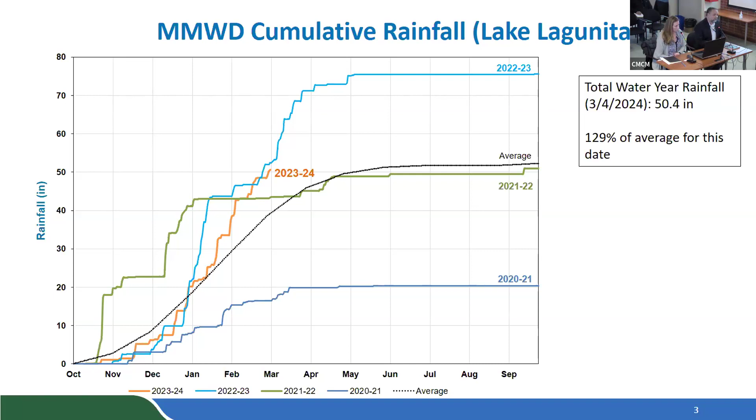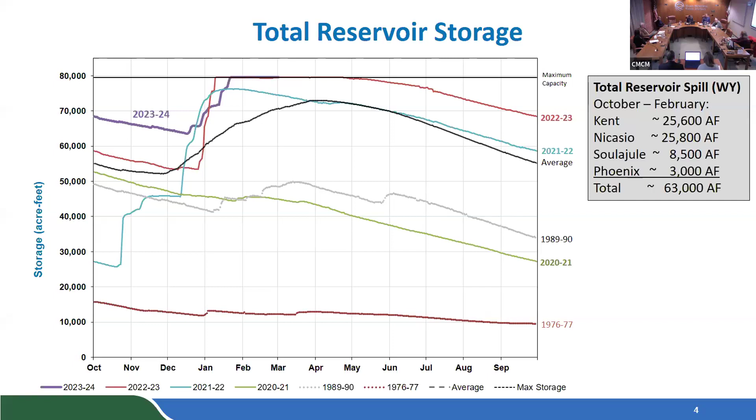This rain has been almost perfect, just every week it keeps the ground wet, never gets a chance to dry out, so it runs off. Shockingly perfect from my experience. I would just say it would be better if it rained during the week and not on the weekend, but other than that I agree. But you got to go back to Phil's thing - that may be true from the human side, but from the nature side, they don't know what day of the week it is.

So actually building off that, the runoff has filled up our storage, and at the end of January we actually started spilling. All of our reservoirs are full, at max capacity for all 7. One interesting thing looking at this chart and the reservoir spill over the last 2 months since we started spilling - going into this water year we were about 15,000 acre feet below, so we've gained that in runoff. With these storms building on each other, we've seen 63,000 acre feet estimated, just in January and February. So between that and the 15,000 gained in storage, we've filled up about 75,000 acre feet in the last few months since the water year started.

We're at just about 50 inches of rain, which ties with what we'd expect for average rainfall and runoff. We typically see around 50 inches producing around 80,000 acre feet. It's always an impressive number to hear 80,000 acre feet for 50 inches, but when you have these storms one after another, this is the kind of impact we see.

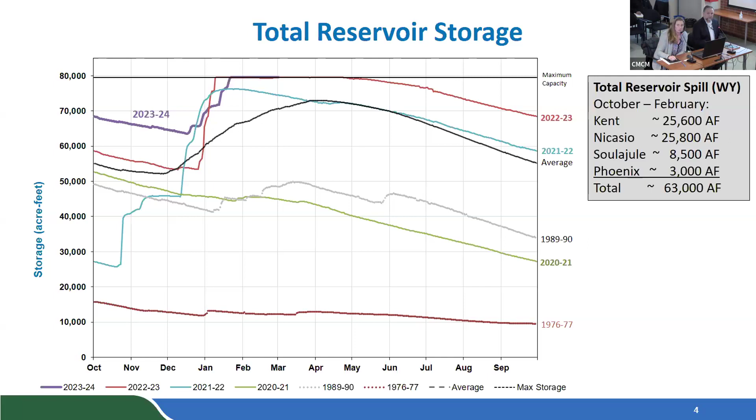We'll see how many more storms we have over the next few months, but right now we're sitting well in our local storage.

Lake Sonoma and Lake Mendocino up in Sonoma Water are also doing well, as you'd expect through the Russian River. Lake Sonoma is at 110% of their water supply pool, which is 122% of average, and Lake Mendocino is at 126% of their water supply storage. Their pool jumps up as they get the storms, then drops below as they release water for flood control purposes.

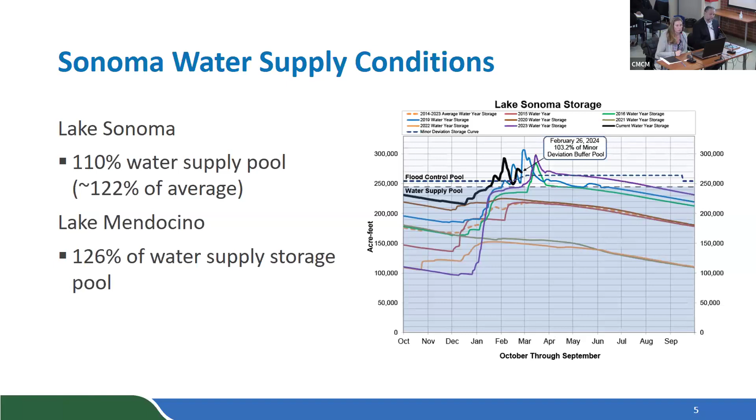Demand over the first two months of winter, January and February, has stayed 25% below 2020 levels, so conservation is remaining relatively high. It's good to see conservation holding through the winter months, and we'll see how that goes as we move into spring and summer.

As Paul mentioned, we did join the Center for Western Weather and Water Extremes, and I'll get into that in a second. I also wanted to note that we're currently experiencing an El Nino, but it's waning. They're expecting that by April we'll move into a neutral position, and by August we might move into a La Nina, with about a 79% prediction. Who's to say what that means exactly, but as I've shown with the charts, we're sitting okay with storage for now, so it's good to see.

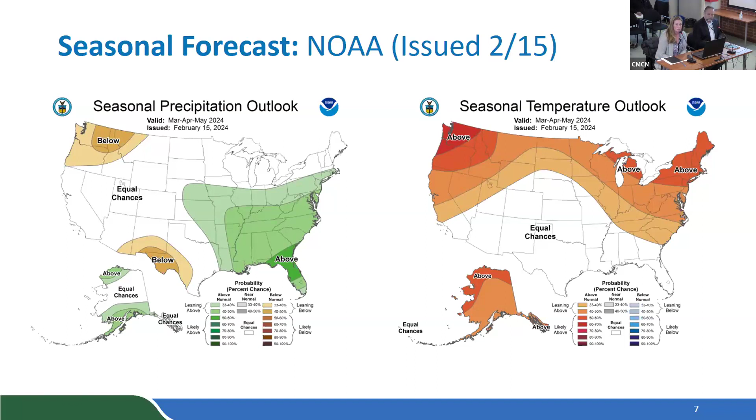The Center for Western Weather and Water Extremes, or CW3E, is a shorter way to say it, and it's an exciting affiliate group that we just joined. It's another resource for us to do better predictions and use tools available, especially to the West Coast and water agencies like us that are impacted by atmospheric rivers. We're excited to get involved and hopefully start bringing these tools into water supply updates over the coming months and years. It's based at Scripps down at UC San Diego, mostly a research institution that has brought in water utilities, so we'll be bringing more of those tools into coming updates.

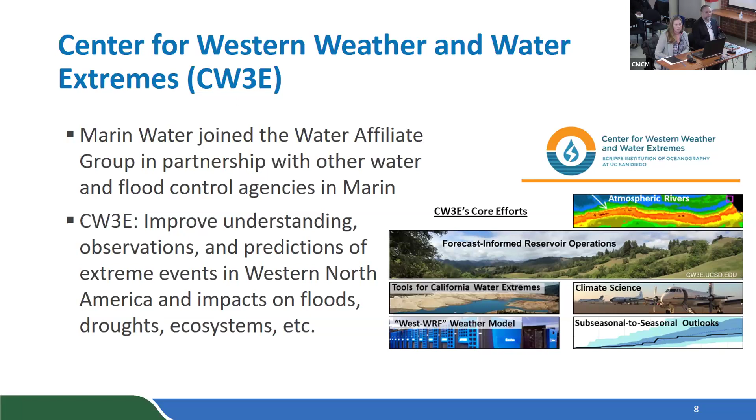Taking another look at projections, given what we're seeing with storage and the runoff we're receiving right now, we're sitting in a good place. Even under a condition where we receive very little runoff through the end of this year and next year, we'd still be above 60,000 acre feet. But we'll see if La Nina takes place or where we go from here. These are the forecasts we've put out, and we'll continue to monitor.

In summary, we continue to see wet weather patterns.

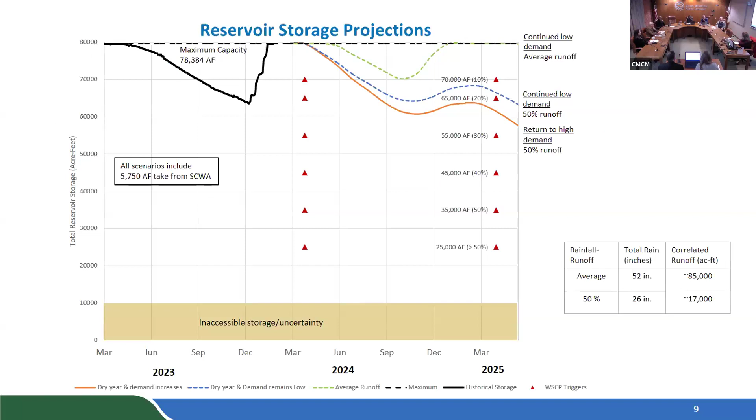So your key sensitivity in this analysis is demand, between the blue and the orange lines, which is low demand or high demand? Yes, that's a main factor, how well people conserve versus use a lot of water. If we were to return to levels of higher demand, closer to 2020, as I noted in that previous chart, we would see our storage drop.

Thank you. It's worth noting that's with a 50% runoff, which is an extremely dry condition, so statistically we're likely to be better than this. I don't know what a 50% runoff would be, maybe a 1 in 10 or 1 in 12 year event.

So the key sensitivity is drought, and secondarily it would be demand, with more variability coming from drought. It's about how fast the reservoirs drop in summer. It's shocking when you know we're pulling 25 or 40 million gallons a day out or whatever the number is, it adds up quick.

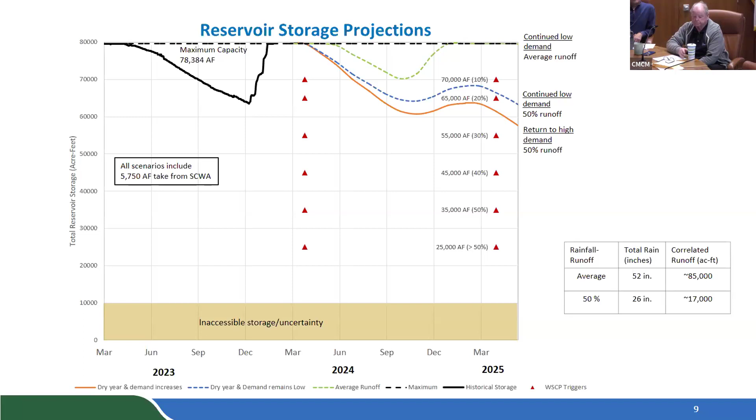So in summary, starting off March with the wet patterns that we've seen, storage is full and we're forecasting that through the next few months it will stay relatively high, and conservation remains high as well. We're continuing to work on water supply projects in the background and we'll continue to monitor seasonal conditions and keep the board updated.

Great, thanks Lucy, nice concise update. Monty, start with you on comments. Yeah, I mean, it's all good news. It's a great place to be in March. Agreed. Jed? Larry? It's great to me. Matt?

No, thank you very much Paul and Lucy for the update. On the slide you showed with the reservoir storage projections, those red triangles—can you remind us what those are? Yes, the red triangles are the water shortage contingency triggers. So if we drop below those, those are the points at which we would bring recommendations to the board to consider conservation levels or reductions in demand—either voluntary or mandatory, so a 10%, 20%, and the lower you get, the more restrictive the proposal would be.

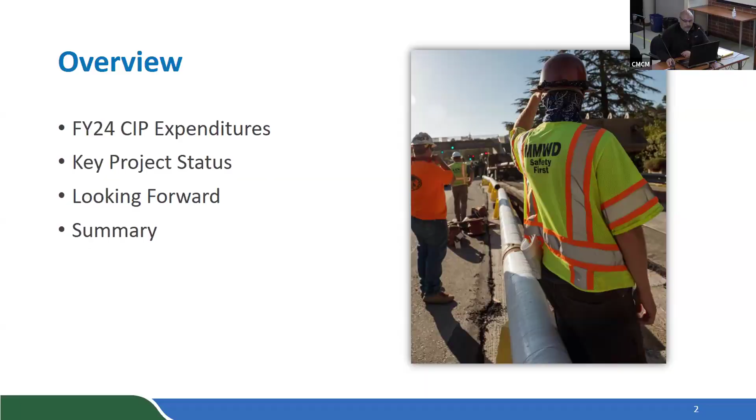Do we ever work out a deal on that steel that we pre-purchased for the pipeline? Yes, we did. We will be using a good bulk of that for the Soulajule pipeline project. So we're working on taking the pipe now, or? No, not yet.

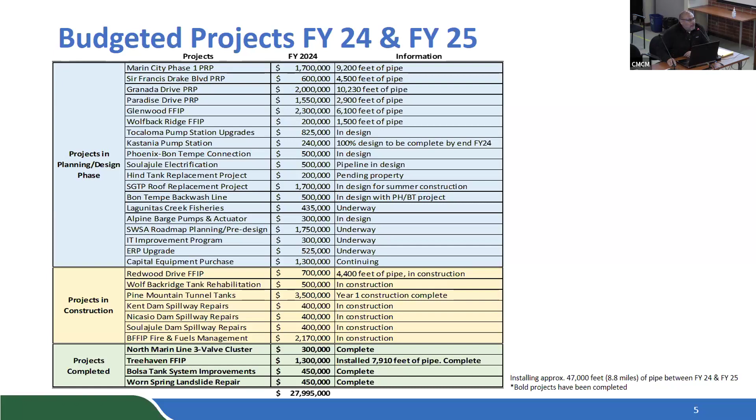A notable thing I want to point out is that the pipelines here represent 47,000 feet of pipe that we'll be putting in the ground, which is 8.8 miles, almost twice what we've installed in recent years. And that's going to bump up even more with the Marin City work. Yeah, that includes Marin City. That's part of it, correct.

As I mentioned earlier in the slide, supply chain issues were an issue the district's been working with. During the pandemic, the world experienced shortages in goods that could not have been foreseen. This also included an impact to closures at the foundries that make parts for the water industry. As production of these goods stopped and available inventory in the market was depleted, that really put a strain on the water industry across the board everywhere. Some of the items that were depleted during the pandemic were brass fittings, copper service laterals, and gate valves. The biggest one we've seen in the industry is the brass fitting components.

And in our case, the one that still represents an issue across the industry is this insulator coupling right here. This insulator is important for our copper service connections to our service meters, because it provides a metallic discontinuity between the consumer side and the copper and the distribution main on our side. That allows protection from any stray currents from causing a corrosion issue on our pipeline and our service laterals. This is a brass fitting that is machined and thermal injected molded with some plastic that provides that discontinuity.

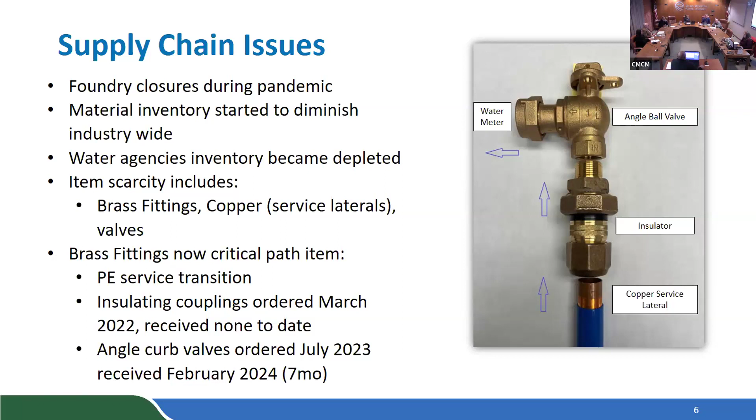So now I just want to talk about some key projects that staff have been working on, starting off with some pipeline projects, some of the larger notable ones here.

The Granada Pipeline Replacement Project will replace about 10,230 feet of cast iron pipe in the town of Corte Madera. Staff will be bringing this item this Friday to the Operations Committee, and we're planning to advertise the project in March this year, with completion in spring of 2025.

The second project is the Marin City project, which will replace the remaining cast iron pipe in Marin City. Given the size of this project, it's been broken into two phases: the first will replace 9,200 feet of pipe, and the second will replace the remaining 6,100 feet of pipe.

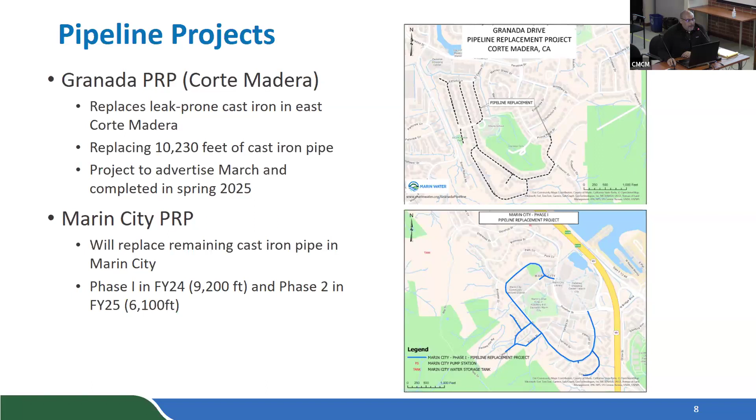Storage tank projects that are notable are the Pine Mountain Tunnel tank projects, which started construction this year, and we've completed the first year of phase 1 construction. In this picture, you can see the current construction site this past summer, where they're constructing the soil nail wall up above.

Sky Oaks Road is located back up here, and this will be the site of our future 2 million-gallon water storage tanks. In phase 1, we'll start again back up in August and it should be completed by January of 2026. Phase 2 design of the actual tanks is underway and almost finalized, with construction starting in fiscal year 26.

Do we have a drone pilot now? Yes, we do have drone pilots. I think it would be nice to fly these once a quarter or twice a year and show them in a 5-minute segment at the board meeting so we could keep up with these projects without having to go there. Okay, we'll definitely do that.

Another project that was recently awarded was... let's go there, let's do it. I'd love to. I'm trying to picture exactly where that is, but the first time I met you was doing a tour of this site, and that was very different. I'd love to go again. Right before Sky Oaks Road, there's a turnoff right there. Right now the area is covered with Visqueen because it's protected for the rains until next season when we start construction. The other problem is it's a little dangerous, so it's hard to find a place. That's why the drone is nice, it can just fly over and look. You may have to get in front of that excavator there.

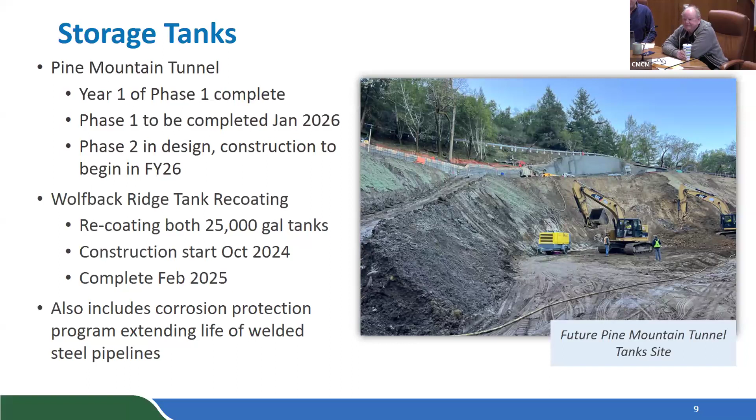Staff is also working on pump station and treatment plant projects. First is the Tocaloma Pump Station project, about a $5 million project that will replace 1960s pumps, motors, and electrical system. Improvements at this pump station will also increase capacity from 20 MGD to 28 MGD. This project is currently in design and is slated to be completed in fiscal year 26.

Our San Geronimo treatment plant roof project is a $1.7 million project that spans two fiscal years, is currently in design, with construction anticipated this summer and completion in October of 2024.

Where is Tocaloma? Tocaloma is on Sir Francis Drake going out towards Platform Bridge. I know where it is. Yeah, take it right.

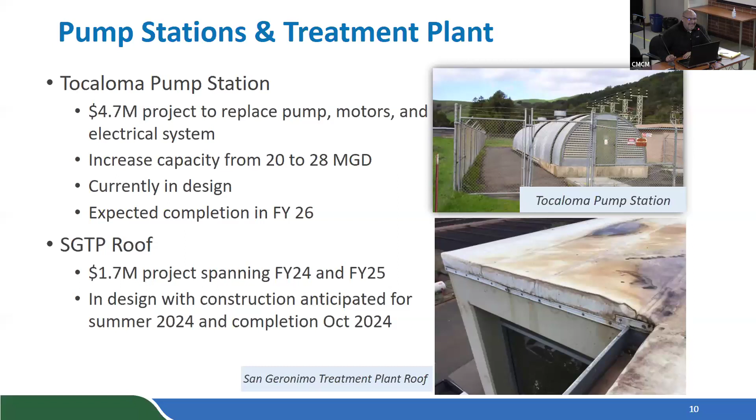The Phoenix-Bon Tempe connection is another project staff has been working on. Staff will come back this Friday to provide a CEQA update, which is on schedule. Phase 1 construction is slated to start this August, including installing the pipeline through the tunnel.

The electrical consultant team has been hired and design is underway. Pump storage is something staff is still working on, requiring more time than anticipated due to technical aspects. Luckily, pump storage can be evaluated separately from the project as we progress, so it doesn't slow things down. Once district staff evaluate all the technical information, they'll come back to the board with findings for further discussion.

This Friday? Further discussion on pump storage will come later, but for the CEQA component, that'll be coming this Friday. Okay, got it.

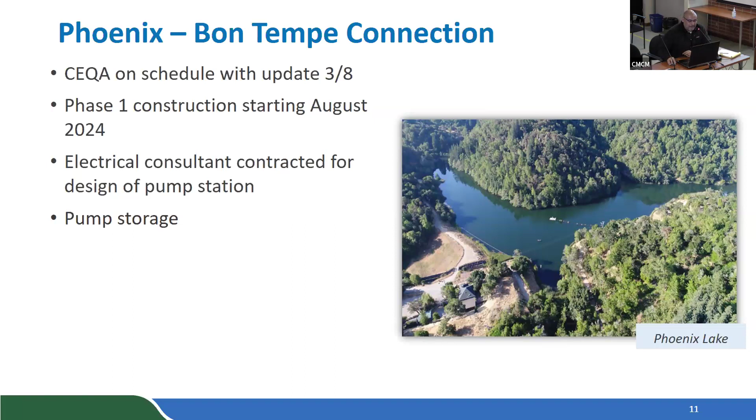Other capital projects are watershed and system improvements. The fire and fuels management project, or BFFIP, was in the capital budget for $2.1 million with a $1 million budget enhancement, allowing staff to treat 1,500 acres of watershed for fire and fuel management. Staff is also scoping the ERP replacement and will come back this Friday with an update. ERP is the replacement for the SAP program.

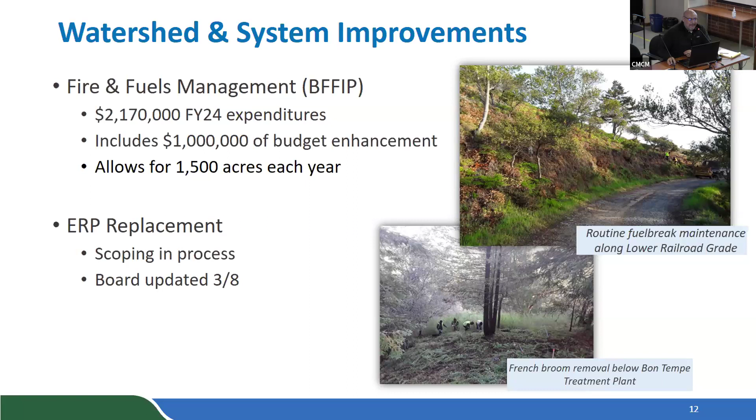Additional water supply capital projects include the Soulajule discharge pipeline, which will install about 2.5 miles of pipe from the current discharge point into the main body of Nicasio Reservoir. Regional and local storage projects are something our water resources director has kept the board apprised of, and staff will return later this year with alternatives for further discussion.

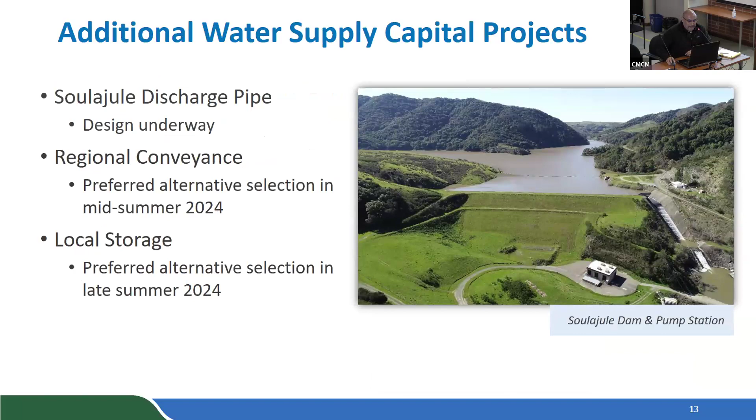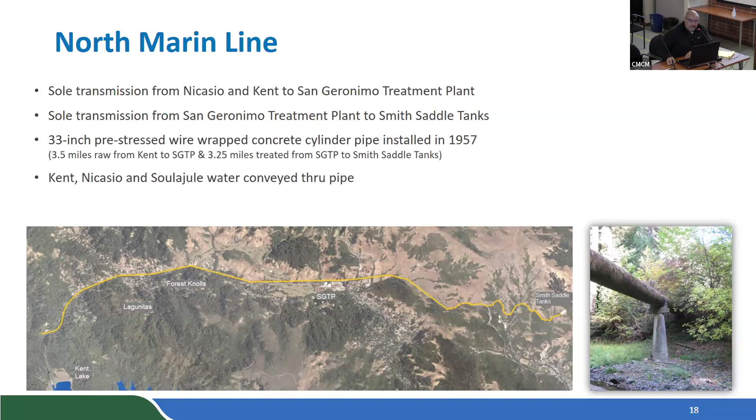Second is the San Geronimo treatment plant, constructed in the early 1960s, the district's largest treatment plant, capable of consistently producing 26 MGD of water. The location, as the crow flies, is about 7 miles from the San Andreas Fault. Since its construction, there have been several seismic code upgrades and updates, resulting in higher seismic structural requirements than those in place back in the 1960s.

In the 1989 Loma Prieta earthquake, the clarifiers at the Rinconada water treatment plant, shown here on the right, which are the same design as those at our treatment plant, were damaged due to sloshing water from lack of lateral resistance. So a seismic vulnerability like this would render the treatment plant inoperable for an extended period during a strong earthquake event.

Just to add a little sunshine to this, the district did apply for a grant back in November for a BRIC grant through FEMA, and we've received notice that it's been moved forward to FEMA for further grant funding consideration. You might also indicate that the reason we're concerned is it's the same design engineer.

And there is an error in the design. There's actually a structural mistake that led to those things laying down there, called launderers. They're the mechanism through which the cleaned water leaves the clarifier. Obviously they're no longer hooked up the way they are in that picture, but we have the same basic root design. Correct.

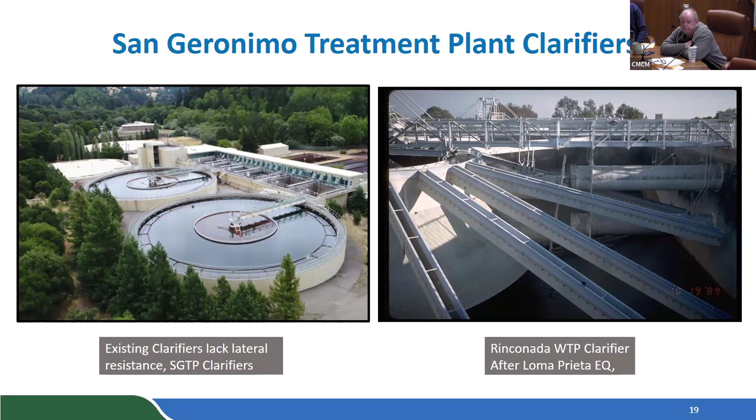The Ross Reservoir is another large project that was discussed. It was constructed in 1927 and is fed from the Bon Tempe treatment plant. This reservoir provides water storage to the Ross Valley area, consisting of approximately 44,000 customers. The concrete reservoir is inadequately sized to serve the Ross Valley area and also has some structural issues.

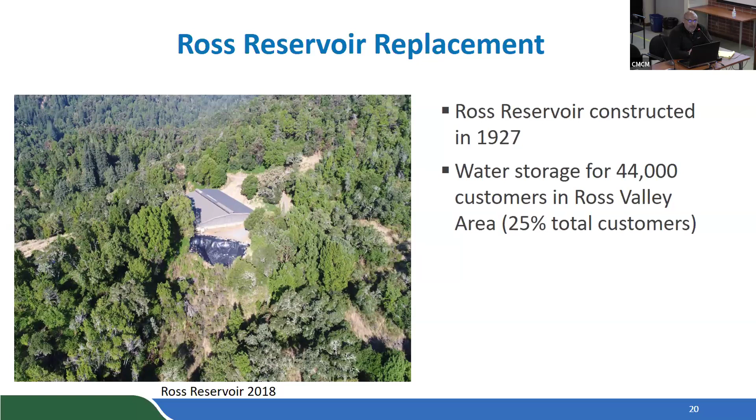Rounding out the four is the Smith Saddle tanks, constructed in the 1960s, consisting of two 5 million gallon water storage tanks fed from the San Geronimo treatment plant. These tanks provide critical water storage used throughout the transmission system in the service area and regularly serve at least 50% of our customers.

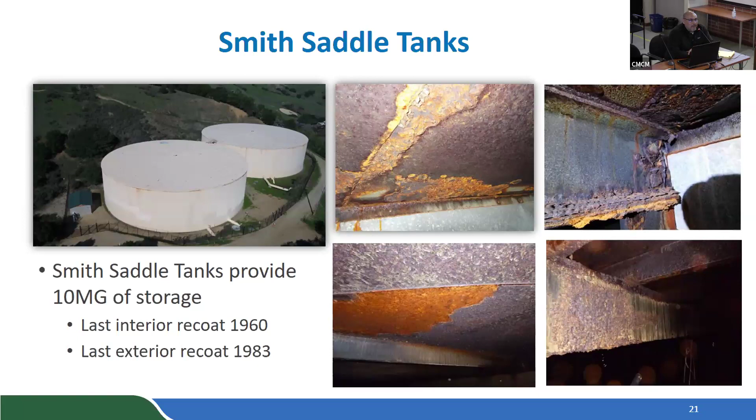A failure in these tanks would cause the district to lose storage capacity for a prolonged period, requiring that flows be regulated through the San Geronimo treatment plant. Regulating flows through a treatment plant is challenging because treatment plants like to operate at a steady state condition. Anytime you fluctuate the flows too much, it wreaks havoc on water quality and requires time to reach equilibrium. So it's very difficult to do.

Likewise, the potential loss of the clarifiers when the big one hits would severely limit the treatment plant's ability to directly filter through the filter beds. And it would not really be sustainable during the hot summer months when demands are high. That would be further compounded if the tanks were also unfortunately damaged during a seismic event.

As I mentioned before, the district has applied for a grant fund through FEMA, and it has been moved forward for further consideration.

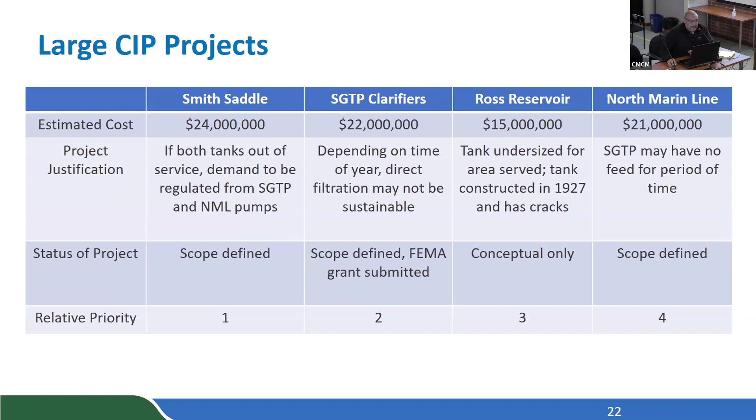So just to wrap things up, the CIP is generally on track, which is good news for us, and we're moving projects forward. Staff will continue to evaluate the resource considerations as we move forward with the enhanced CIP. Staff will be returning to the board sometime mid fiscal year in '25 to consider moving forward with bond funding on select large capital projects, and staff will be providing the board with quarterly updates on the CIP as the district goes forward with the program.

So at this point, we'll take any questions. Thanks, Alex, great summary. Jed, start with you.

It's hard for me to tell whether you're recommending something different than we already approved. I think we had a specific timeline for spending money on those 4 main capital projects that we approved. So Ben, can we talk - are there any changes? We're just identifying which are first, second, third, and fourth. I think they were all contemplated, I think they were all in our projections. And I can't tell - are we saying the last 2? I just don't know what's different.

As part of the rate setting process and budget development that we went through last year, we've recognized these 4 projects. The way I look at it, it's an ongoing discussion. The board did elect to have that $5+ million for debt service next fiscal year, so that's part of the revenue plan. Based on the rates at the time, we'll look - the sense is rates are going down, but generally, if rates stay where they are, interest rates, it's about a 10-to-1 ballpark, so 5 million gets about 50 million. So that could change. What I suppose is new tonight is the priority, recognizing this is an ongoing discussion.

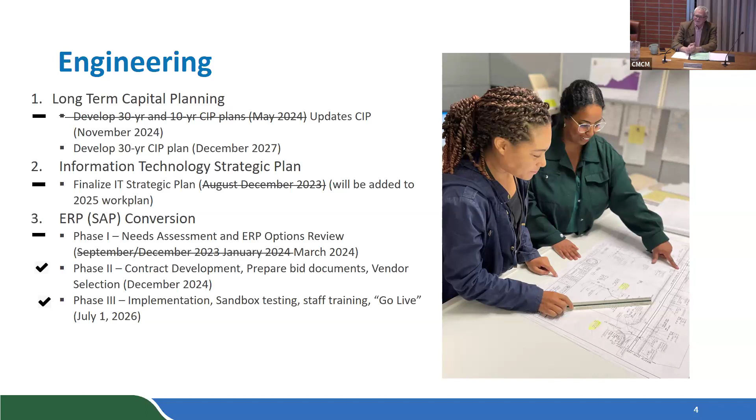ERP stands for Enterprise Resource Planning. Oh, got it - pretty hard to do a conversion before you have a plan. Yeah, right, maybe the plan - the strategic plan.

I think that's really more the nuts and bolts of the IT system - things like migrating to Microsoft 365, that's really distinct from the SAP work. Moving more to the cloud. Yeah.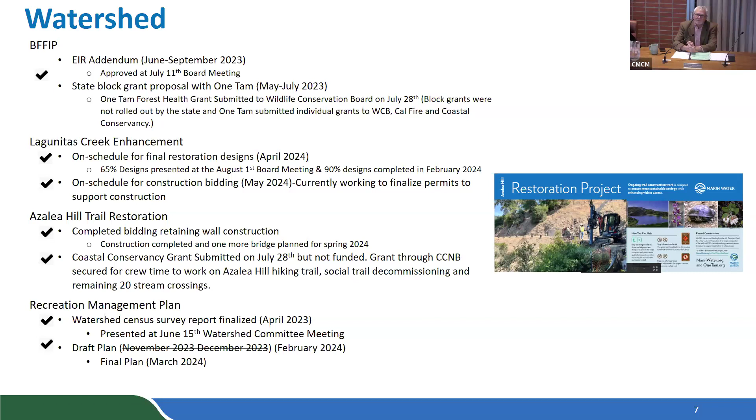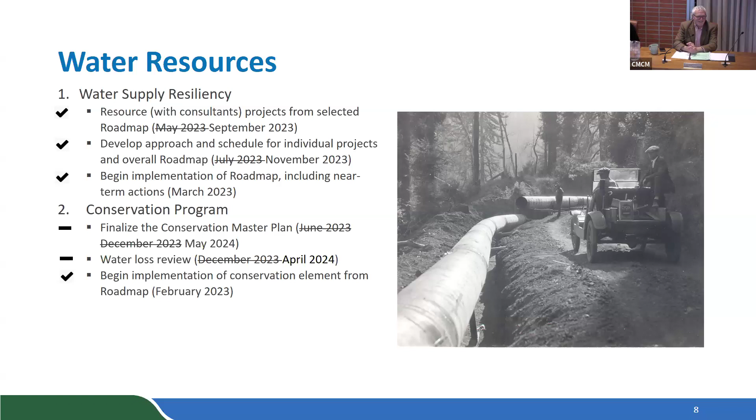So in summary, this past year was dominated by the COSA rate setting budget process along with the MOU and roadmap. Even within that, there were a number of advancements on enhancing touch points with customers, as we talked about, and continued success on leveraging grants - we're really doing well. We have new leadership in the operations division, with a lot of work getting that going, but it's going very well: 3 new superintendents and a number of cascading promotions. You heard about our work to ramp up capital delivery tonight, plus 360 initiatives, quite a lot of work this past year in HR as well as watershed. That concludes it. Any questions?